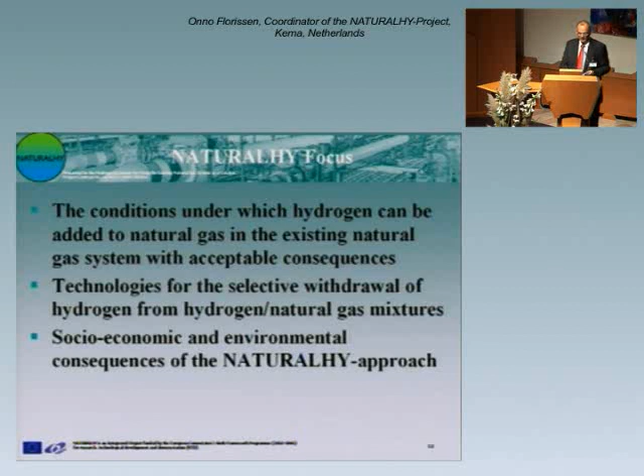This graph shows a simple natural gas delivery chain. On the left you see the high pressure transmission grid. It's steel pipelines, compressors included, underground storages. So that is this size and even larger pipeline diameters. From there, natural gas flows by pressure reduction facilities to the medium pressure regional distribution system.

Large consumers are connected to that, and very large consumers, for instance power plants, are connected to the high pressure grid. From there, the gas flows further into the distribution grid. Also, there are industrial end users connected to it. And finally, it comes into our houses, the end user infrastructure, and finally in our end use appliances.

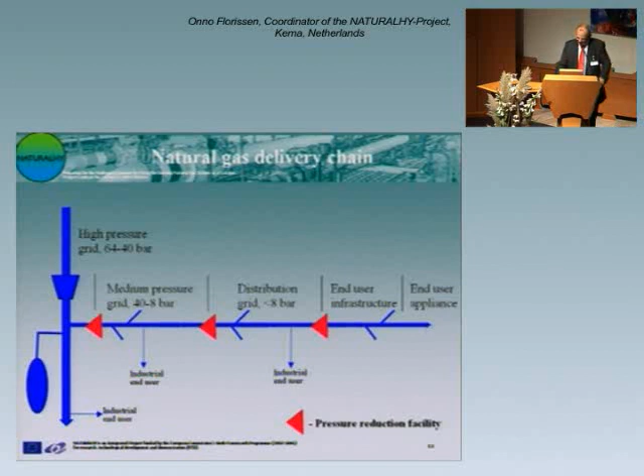Well, now the idea of NaturalHy is, somewhere where it is beneficial, let's say a logical point, to inject hydrogen in the system, as indicated here in the medium pressure location. I already said that the high pressure grid is of steel, the medium pressure grid is also made of steel, but the distribution grid and end user infrastructure are made of PE, PVC, cast iron.

So the idea is to inject the hydrogen here in the medium pressure grid that is further delivered to end users that can use the mixture as such. And there's also the idea that, for instance, by means of membranes, hydrogen can be taken out from the mixture and used in, for instance, fuel cells. That's the NaturalHy approach.

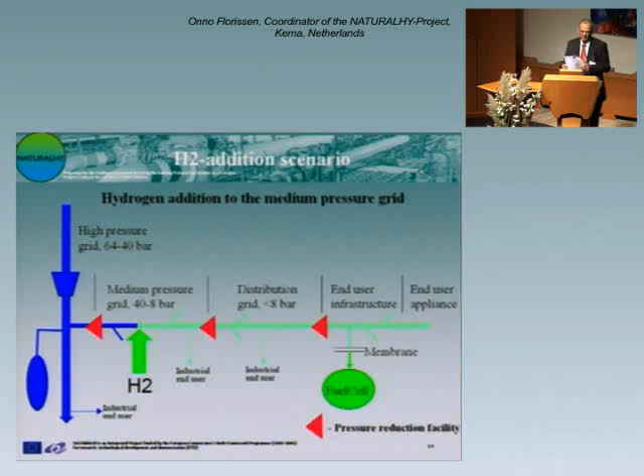However, if you add hydrogen to natural gas, there's a change of the physical and chemical properties of the gas in the network and of the gas delivered. And that has quite some consequences. For instance, the combustion properties. Adding hydrogen will change the caloric value of the gas.

It also changes the amount of air needed for a good combustion of 1 cubic meter of gas. It changes the flammability limits of the gas-air mixture. And for instance, it also has an impact on the flame velocity. Hydrogen can also diffuse into materials and change the mechanical properties of the materials.

Also, the dispersion of gas in air changes, and this has, for instance, impact on the gas buildup in case of leaks, and also on the behavior of clouds in open air. Well, in fact, all these consequences of these changes are represented in the project organization that we indicated here.

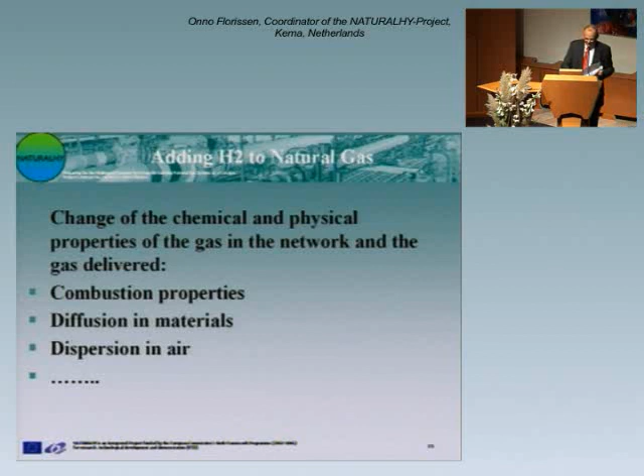The work is organized in work packages. That is a group of partners working on specific issues. Each work package is led by a work package leader.

Well, the work packages are indicated here. The work package on durability is focused on to which extent pipeline materials are affected by hydrogen. And I can already say that particularly the growth of small cracks is a very important issue in this. The work package on integrity concerns the monitoring, maintenance and repair of pipelines. It defines which measures should be taken to mitigate the impact of hydrogen on pipeline systems.

Safety. I already mentioned that the combustion properties are changed by adding hydrogen to natural gas. Well, this also has an effect on severity in case of explosions and fires. I also said that the pipeline materials, the properties of those materials, may be affected by the addition of hydrogen. And this might, let's say, change the probability of failure. Well, in combination with the severity of effects, this may change the safety aspects in case hydrogen is added to natural gas. That's further investigated in the work package on safety.

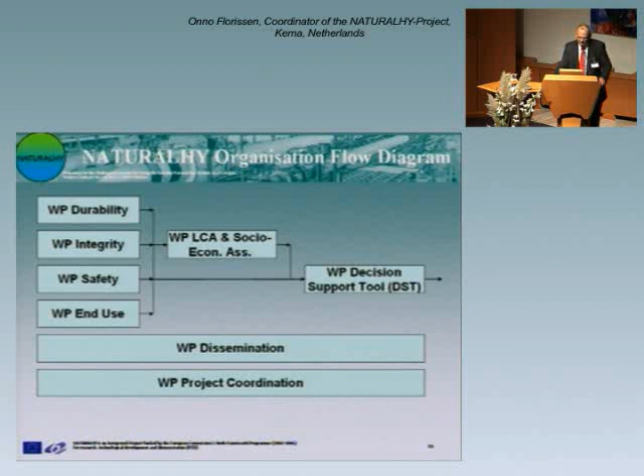The work package on dissemination, very important. It concerns the dissemination of results and information to third parties, so that also other organizations can use those results. Dissemination has taken place by newsletters, workshops, website, and also, of course, this final presentation. This shows the management team of the project, and in here you recognize the presenters today on the related issues.

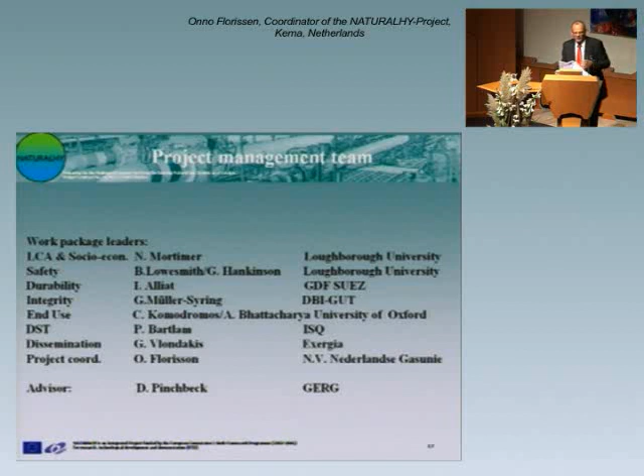Some characteristics of the NaturalHy project. As Carlos already mentioned, 39 partners are involved in this project. It's a so-called integrated project within the 6th Framework of the European Commission. The project started 1st of May 2004 and lasted 5.5 years. Our overall budget is a bit more than 17 million euro, and the financial funding by the European Commission amounts to 11 million euro.

Next to the consortium of active partners, there's also an advisory committee in which all kinds of stakeholders take part. I'm very pleased to see that quite some of these stakeholders are also present here today. And finally, the NaturalHy project is recognized as a project in the framework of the International Partnership for the Hydrogen Economy.

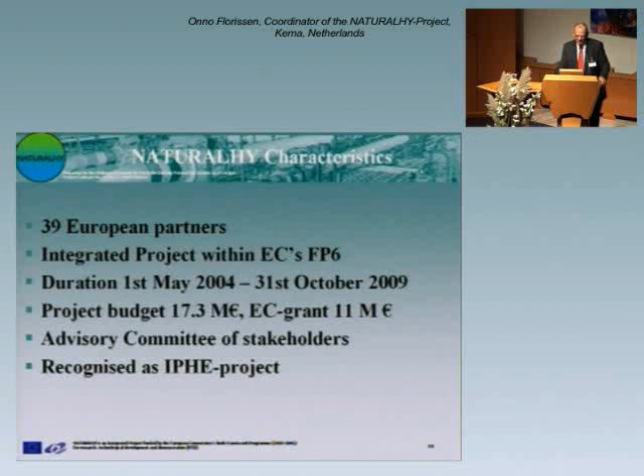Well, just to give you a flavor and not to reveal too much of the final outcomes, generally speaking, we can say that the maximum percentage of hydrogen added to natural gas is limited by the 3 main things indicated here. It's a bit limited by pipeline materials. Safety is more stringent. But as we see it now, the performance of end-user appliances is the most limiting aspect in the NaturalHy approach. This will be further explained by the next authors.